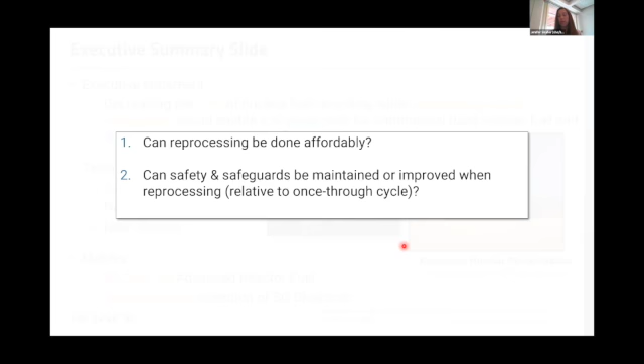So can we actually develop a reprocessing scenario that has safeguards and materials accountancy aspects that are actually preferential to what we're currently doing now?

So why is reprocessing actually such a compelling technology, at least in the eyes of this program director as well as the agency? So one is it provides a unique opportunity to stabilize our fuel supply.

And so Bob was able to talk about significantly the role of supply chains and the aspects that need to be paid attention to with respect to supply chains broadly with respect to the nuclear fuel sector, but it actually turns out that the HALEU fuel supply and just fuel supply in general is crucial to manage with respect to the advanced reactor fleet, especially considering current world events.

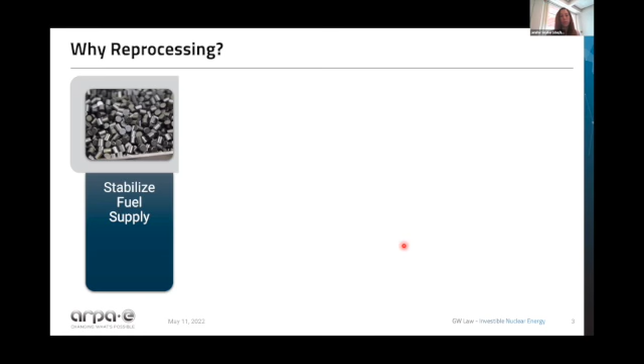And so this is potentially one mechanism that we could stabilize as well as improve the domestic security of.

We can also anticipate a potential social benefit associated with reprocessing technologies, in that you have more flexibility in how and where you deploy a reprocessing facility with respect to the broader community, as opposed to other options where you might not have as much freedom, like mining uranium, since uranium deposits are only in particular places. This provides an aspect of flexibility, which could also confer social and environmental benefit that we are attentive to, and improved resource utilization.

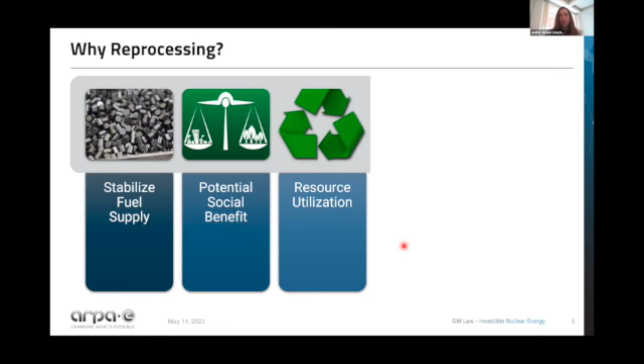For example, the 86,000 metric tons of used nuclear fuel that we currently have, depending on the type of reactor you deploy, could provide fuel for fundamentally the next 50 years or longer, based on what we already have in stock.

It also potentially enables fuel takeback. This has been attractive to some countries looking to bring in advanced reactor technologies from other countries, the possibility that countries selling to them would be willing to take back their fuel. And if we're in a position where we can actually reprocess the fuel, this would be enabling because it would render a much decreased waste and volume footprint.

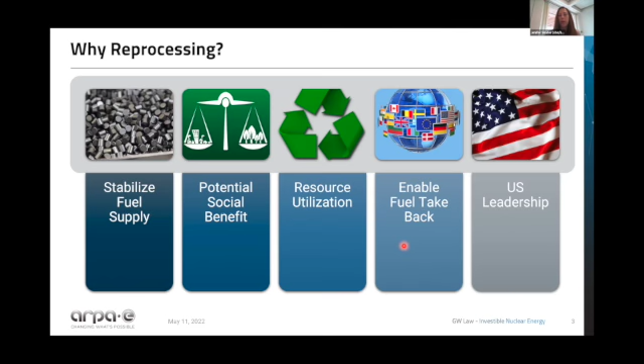And of course, this provides an opportunity for the U.S. to assume leadership with respect to this, if we fundamentally reimagine our approach to reprocessing and basically set a new standard for how this is to be done.

There are a couple of challenges with respect to looking at this. One of them, of course, is economic factors that intersect with reprocessing. We know the technology as it currently sits is at least about 3 times as costly as our current alternative technologies, things like fresh fuel and HALEU enrichment.

Another factor we have to be very attentive to is nonproliferation and materials accountancy. From a U.S. leadership perspective, we have to be very attentive to whatever treaty obligations we have, and in general, what role we participate with in the world stage and how we bring technologies forward to have a strong position there.

As already said, our current reprocessing technologies cost on the order of 3 to 9 times that of fresh fuel, depending on which technology you're considering.

Another thing with nonproliferation is that in general there can be concern with respect to the accumulation of separated plutonium and separated as well as accumulated material. I think there are things we can do in the development of technology to minimize the accumulation of material, as well as having a really robust and precise assessment of the material on hand. These are things we are attentive to.

And ultimately, what we would like to develop and build is a secure and affordable technology.

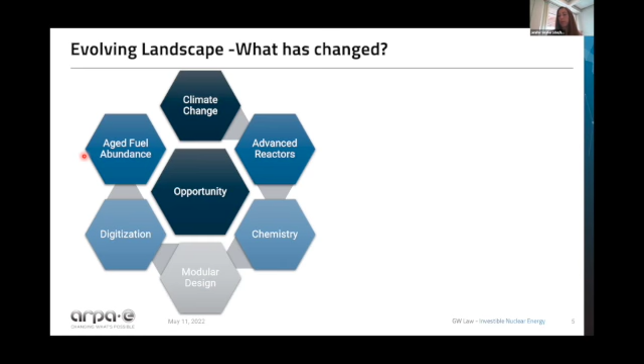All of this ultimately lends itself to an opportunity for us to be thinking about this seriously and really capitalize on the confluence of the factors that I've outlined here.

Another thing that's absolutely critical is that we've never actually taken a ground-up approach that considers all of these factors—the evolving chemistry, meeting advanced reactor designs, and minimizing waste—with the types of reprocessing technologies that have been developed to date.

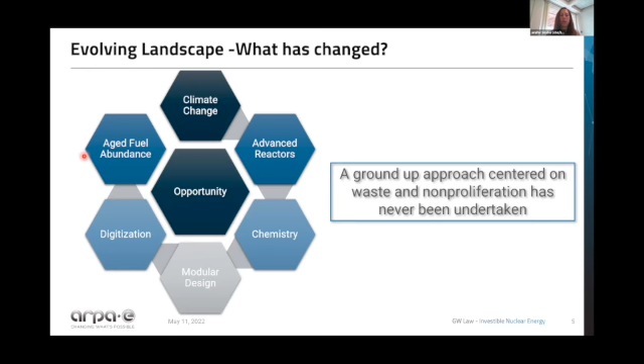The types of technologies that have been used are actually co-opted from the defense program, and as a consequence, they didn't have the same waste management attention, economic attention, or materials accountancy attention placed on them—especially since things were so early stage. So this is an opportunity, we think, to leverage things in an interesting way.

So what do we need to do when looking at a potential pathway to deployment of technologies? We know that if we're here in 2021—actually this slide is old, it would be 2022 now—we need to identify the technologies that we think are most compelling and enabling in this regard. By 2028, perhaps complete a pilot facility design for something that could go through regulatory approval and be discussed seriously.

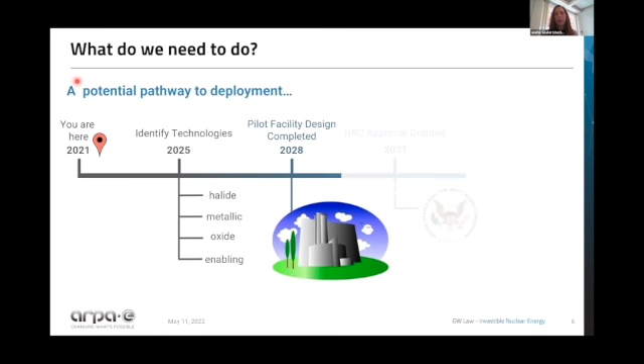Hopefully we could get some regulatory approvals in place, and then perhaps have a pilot facility operational around this timeline. So you can see I'm not explicitly proposing a solution that's going to get us there tomorrow as far as reprocessing technologies, but we think this could be broadly enabling even on the timelines considered here.

I'd like to say a couple of things about the Onwards program and CURIE program as we understand them. As I mentioned earlier, I'm not the program director responsible for Onwards—that's Bob Ledoux. What Onwards was really positioned to manage is to develop technologies that could significantly minimize the disposal impact of waste from advanced reactors while maintaining disposal costs in the range of $1 per megawatt hour.

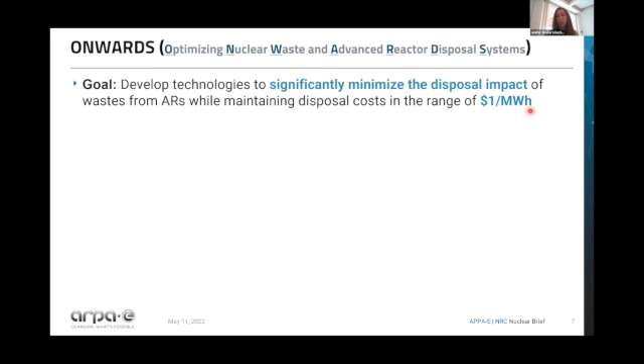Of course, the driver for that is staying consistent with the current nuclear waste management fund that was collected for management of used nuclear fuel, and basically staying consistent with precedent there.

We know this is basically how an advanced reactor closed fuel cycle could look. Onwards is seeking to support the development of technologies that enable a 10x reduction in waste volumes or repository footprint with no weakening of safeguard standards.

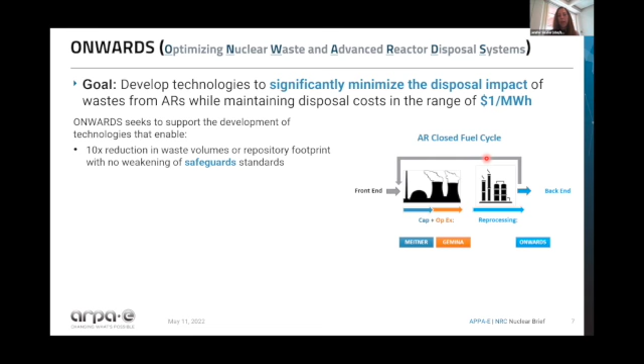There is also an importance for better than 1% accuracy in fissile mass measurements, and we want to make sure these can be executed in high radiation backgrounds, because the way that certain fuel cycle designs for fast reactors and advanced reactors leverage the fact that you have short turnaround fuel associated with them. We'd also like to improve the proliferation resistance of uranium and transuranium materials recycling, as well as not producing pure fissile material streams during processing.

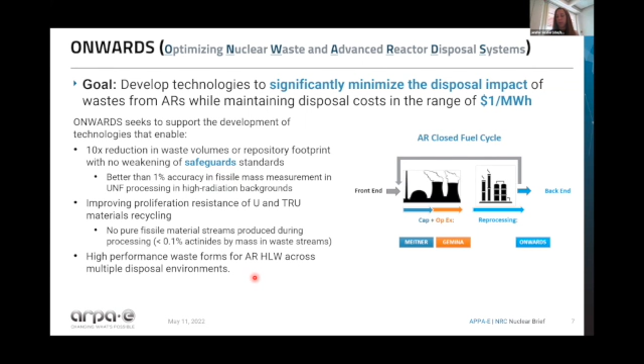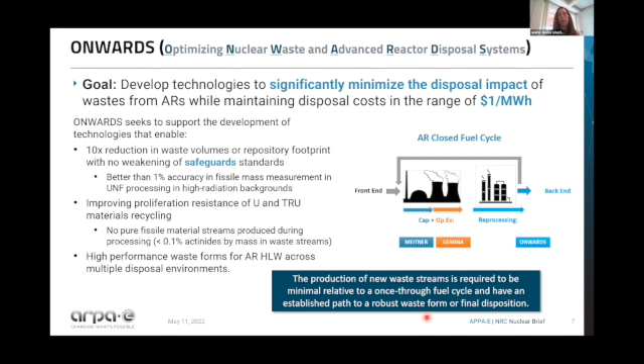So we also want to make sure that we are not sending actinides to waste streams. A really important part for Onwards is also making sure there are high performance waste forms for advanced reactors across multiple disposal environments. This was something we noticed when we looked across the fleet that had yet to be developed. Absolutely critical to the philosophy of Onwards is that the production of new waste streams is required to be minimal relative to a once-through fuel cycle, with an established path to robust waste form or final disposition. We don't need to be developing new waste streams that significantly impact the back end. Making sure we're attentive to that up front, because at the end of the day, that can not only serve as a significant cost liability, but also a regulatory liability, and a social one for that matter.

So when it comes to CURIE, as mentioned earlier, this is the project or program that I'm running. Here we're looking at converting used nuclear fuel radioisotopes into energy. Really we're looking to enable the economically viable reprocessing of used nuclear fuel from our current light water reactor fleet by resolving key gaps and barriers we've identified in reprocessing technologies, process monitoring, and facility design.

When it comes to the global metrics here, of which we have several, we're also attentive to the waste volume, making sure that it is not ballooning, we actually want it to decrease significantly. We want to maintain our disposal costs consistent within the bounds of the historical nuclear waste management fund. We also have a cost goal of providing a cent per kilowatt hour fuel cost for a 200 metric ton heavy metal per year facility. This is basically consistent with what we anticipate to be the hopeful market cost for HALEU when it's available to the market.

And we also want this - and this is especially a kind of double challenge - trying to do this on a small scale facility. So something, and I realize 200 metric tons is still a lot of material, but this is smaller, much smaller than some previously considered facilities.

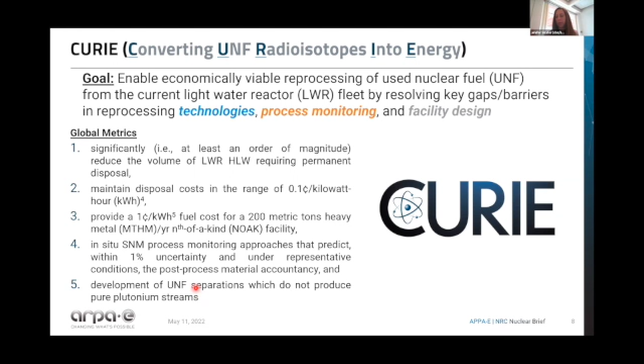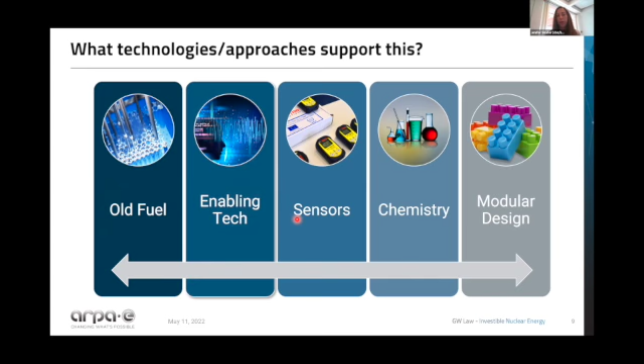And then we also want the development of used nuclear fuel separations which do not produce pure plutonium streams, consistent with Onwards. So what technologies broadly are actually enabling in looking at this? As we already talked about the potential benefits, though some could argue limitations, especially if you're going after valuable short-lived radioisotopes when considering used nuclear fuel greater than 30 years old. There's broader enabling tech being considered here - things like additive manufacturing, AI/ML, sensors and new sensors are crucially important to this, as well as chemistry and some of the benefits of modular design.

One thing I'd like to underscore with respect to digital twin opportunities is that this is already ongoing with the agency with respect to advanced reactors, and as I mentioned earlier, I'm currently managing the Gemini portfolio. Why we think this is so crucial is that through the use of digital twins and active monitoring, you can actually reduce preventative maintenance work hours by something like 37%. If deployed, you can actually cut well-designed times in other industries by something like 80% if you're doing effective modeling. So this is something we'd really like to bring to bear in the nuclear sector.

As I mentioned earlier, the Gemini program is already looking at this for advanced reactors, and this is something we hope to consider more seriously, and actually are starting to consider in the Onwards program with respect to reprocessing technologies. The core tenet of Gemini was that we would like the operation and maintenance costs of advanced nuclear reactors to be consistent with current combined cycle natural gas plants, basically driving that down significantly.

When it comes to the chemistry, I don't want to spend too much time on this slide, if only because I might be the only chemist in the room looking at this.

What I'd like to suggest is that there are core opportunities to think about with respect to chemistry. One is that we actually have the ability to control the transuranics and their chemistry in a different way than we had available previously. As a consequence, we can much more effectively bring all of our fuel cycle relevant transuranics, like uranium through americium, up into this hexavalent oxidation state, where they, at least in certain media, will obtain a similar chemical configuration. This allows us to extract them in a combined way, which is enabling if you're trying to prevent pure plutonium streams from being developed.

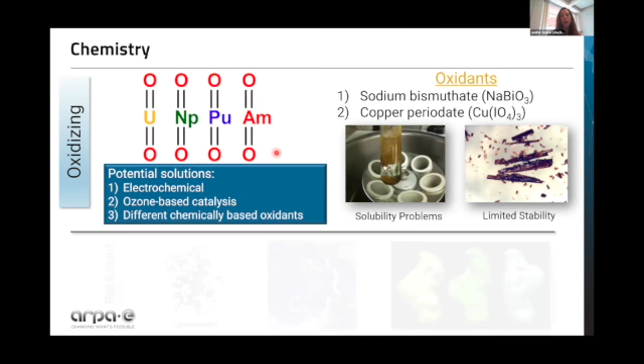We also know there are some unique opportunities potentially in bio-based separations, partly because on some level they involve more neutral chemistry. Frankly, every time you see an additional hazard associated with a chemical process, you can almost think of it in terms of dollar signs, because of the additional engineered safety needed, and because you want people to be deliberate working with more hazardous things, which requires additional time to make sure everything is administratively in place. This is compelling because bio-based separations would be intrinsically safer on a lot of levels than currently deployed things.

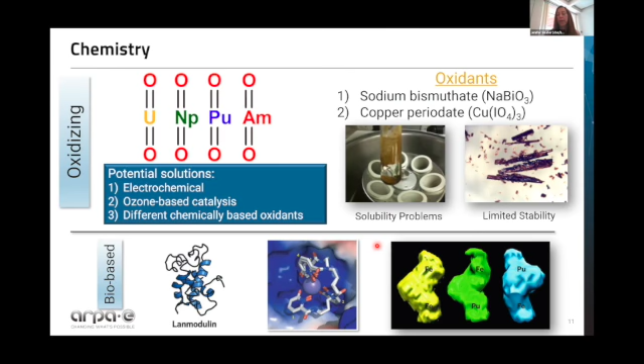But you could also imagine developing certain separations where you'd only allow the separation to occur if there was a mixture of uranium and plutonium present, intrinsically within the molecule. So if you have pure plutonium, the separation doesn't happen and it's blocked at a foundational chemical level. If you have a mixture, it's enabled to pass through. That's based on the idea that certain proteins might maintain different configurations based on the metals actually present in them.

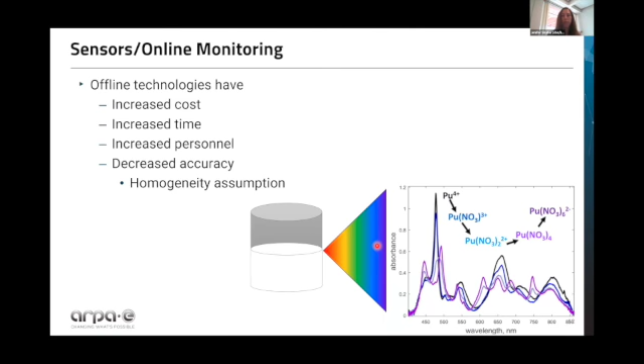So we can talk a little bit about sensors and online monitoring. We know that offline technologies have increased cost, time, and personnel needs, as well as decreased accuracy. We know online technologies would allow more complex chemistries, some of the things I was talking about earlier, because you can really monitor it in situ and your chemical separation is not a black box, as well as enabling in situ plutonium monitoring.

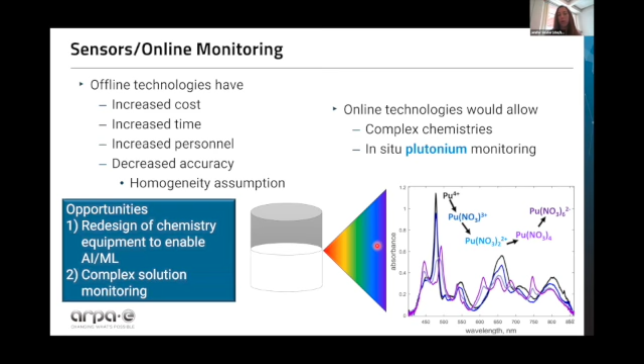We think some of the opportunities here are potentially redesigning your chemistry or your system to enable AI and machine learning approaches, as well as complex solution monitoring.

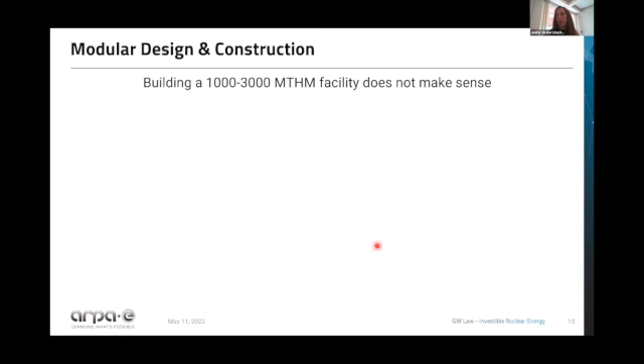When it comes to modular design and construction, I think especially at this time, though maybe someday we'll deploy a lot of nuclear, building a 1,000 to 3,000 metric ton of heavy metal per year facility within the US does not make sense at this time.

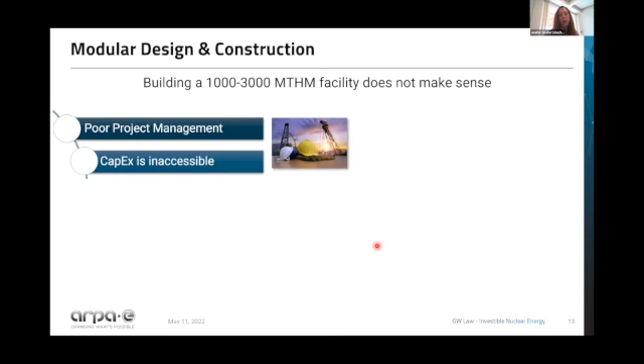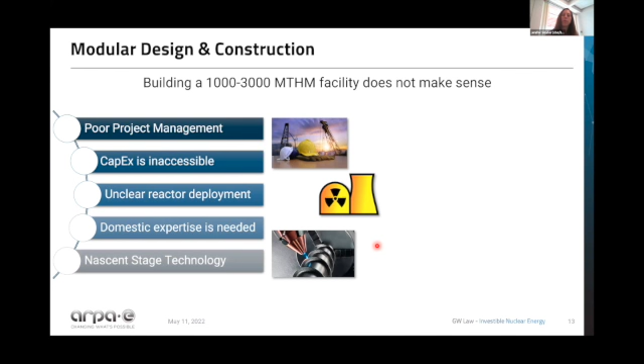We also know the nuclear industry has struggled with dynamics and factors related to poor project management. We know the CapEx is inaccessible. We also have factors of unclear reactor deployment, and we need to develop a broader base of domestic expertise. If you start smaller, this enables you to use perhaps more nascent stage technologies that are more underdeveloped at this time, but could scale more appropriately with a modular approach.

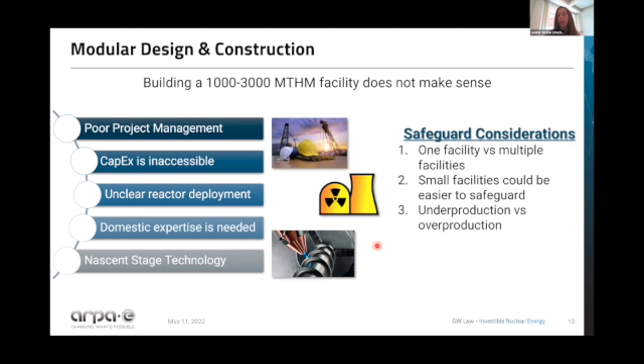It also comes back to the idea of putting yourself in a position where you're more able to meet market demand at a particular moment, as opposed to perhaps oversupplying material that might come along with a larger facility. So that was in general the conversation I wanted to have with you today. At the core of it, we think this is a great time to be thinking about reprocessing technologies, what they could look like for the future, and how they might intersect with advanced reactor technologies.

And I appreciate the attention that you paid.